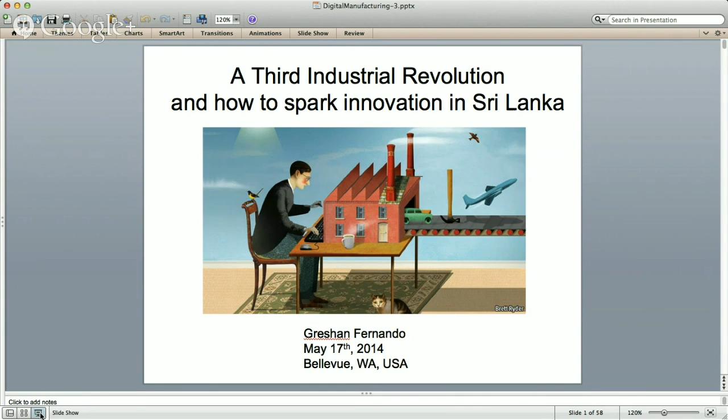Now, before that, let me talk about some historical perspectives in terms of industrial revolutions. As you know, we had the first industrial revolution that started in Britain in the 1700s, and it started with the mechanization of the textile industry. The large textile mills were born, or in other words, the factory was born in that era during the 18th century.

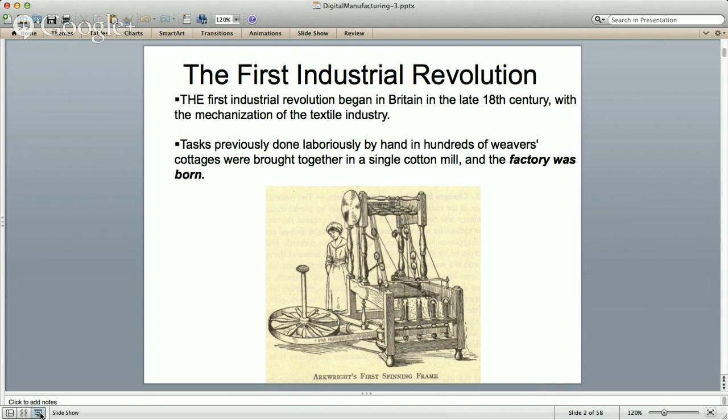Then there was a second industrial revolution in the early 20th century, where Henry Ford mastered the moving assembly line and ushered in the era of mass production that we know today. With that, we had the expansion of railroads, development of steel and oil industries, a communication revolution, and great advances in transportation.

Those are the good things, but there were also bad things that came along, like very difficult conditions for the industrial workers, and massive profits for business tycoons that created income disparity within society. So there were a lot of good things and bad things that came along with these first and second industrial revolutions.

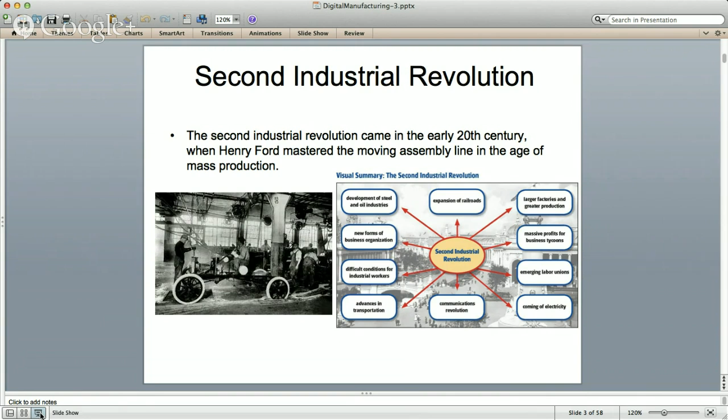This slide shows a comparison of the first and second industrial revolutions. In terms of energy, in the first industrial revolution the main energy source was coal, and in the second industrial revolution it was petroleum and hydroelectric power.

Now, as we know today, coal and petroleum are the biggest culprits for global warming. So these industrial revolutions have introduced massive new problems that threaten our world today. Although we had a lot of positive impacts to society from these revolutions, we have also experienced great challenges that came along with that.

As I said earlier, the first two industrial revolutions made a group of people richer, and a group of people became more urban, as we know today. So we have a very rich group of people today, like business tycoons, and then we have a very poor majority of people today who work for these business tycoons or big companies.

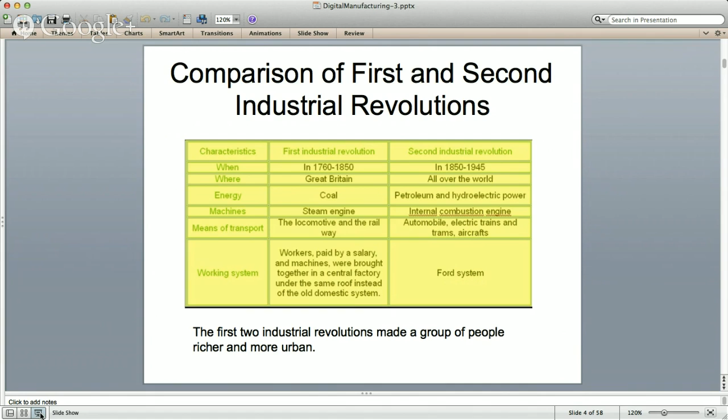Do you guys have anything to add on what I just said? These are some historical perspectives that I wanted to start with. I would like to hear any thoughts on what I just said, if there is any. But you don't have to, I'm just asking. All right, I think they already studied this, so you can go ahead.

Sure, thanks. Okay, and then after these two industrial revolutions, there came a digital revolution that we all know very well today. In fact, most of the participants here in this discussion know very well about this digital revolution, so I don't have to talk especially on this one. In fact, we have this Google Hangout session thanks to this digital revolution.

This digital revolution marked the beginning of the information age, and that created some new opportunities. In fact, the next industrial revolution was facilitated by this digital revolution. As an advancement of that digital revolution, this third industrial revolution is underway - that is, manufacturing is going digital.

With the digital revolution, we had enormous progress, of course, and the focus of discussion is not to talk about those things like internet and cell phones and everything that we enjoy. As you know, all these revolutions were disruptive. They changed society.

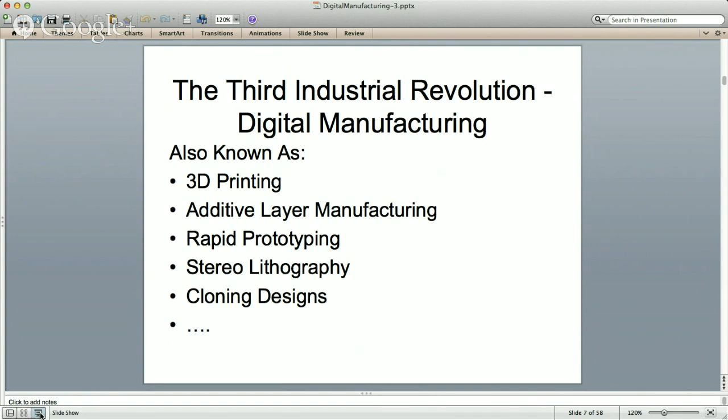There may be several other terms loosely used that mean the same thing. So I'm going to go through a brief technology overview.

Digital manufacturing consists of a class of technologies that can directly construct physical objects from computer-aided design files. As I mentioned earlier, this digital manufacturing could trigger innovation worldwide and provide opportunities for everybody towards prosperity. It could greatly improve product accuracy and eliminate the mistakes we do today in product development.

Most importantly, we can customize products with greater flexibility, and also have something called personal fabrication, meaning we can make things for our own consumption as we wish. It will accelerate time to produce, reduce product cost, and improve collaboration globally—meaning we can share our designs globally and make things locally. It could save this planet and save your life one day.

So again, I will show you some examples toward that direction. Now I'm going to show you a YouTube video on the things I just discussed. Let's watch it—it's about 7 minutes—and after that let's get back to the presentation. Chaminda, how are we doing with the time?

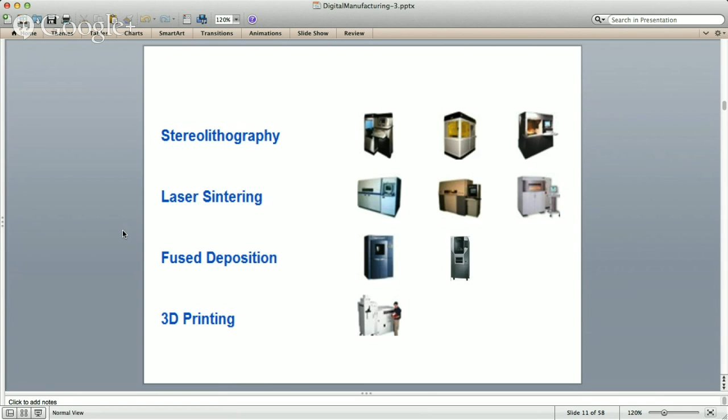Now these machines range from like 10,000 to sometimes $500,000 today. Some of these fused deposition machines are very expensive, and laser sintering machines are also very expensive today. But there are 3D printers that we can buy from Amazon.com today for like $500 or sometimes $1,000, and they can produce parts using plastics only, with a small build volume. Now the machines you see here are commercial grade ones, and we have some of these at Boeing. Unfortunately, I don't use these machines directly, I'm not directly working on 3D manufacturing at Boeing, but I have seen this in operation there.

Now, this is a functional assembly, as you see here, that was printed as a single step, single shot from a 3D printer called the Z printer from Zcorp. Zcorp is now called 3D Systems today in the US. Now these are printed using powder material, so this is just a prototype, but it's a functional thing. These parts move and it functions as expected, but it cannot carry any loads in this particular one, so it's not very strong, but this was done about 4 years back by Zcorp. So, as I said earlier for one of the questions you had, they have built functional assemblies.

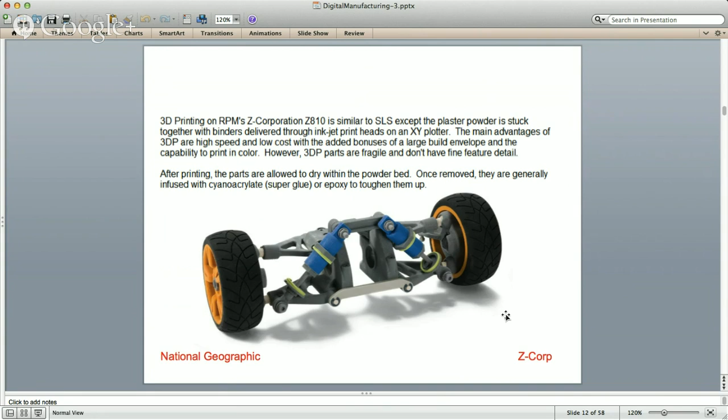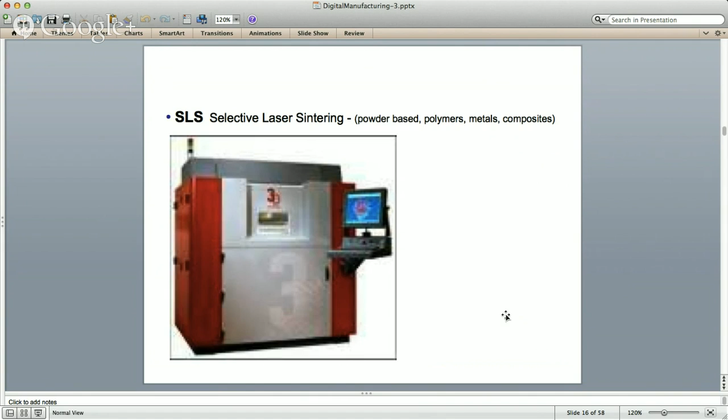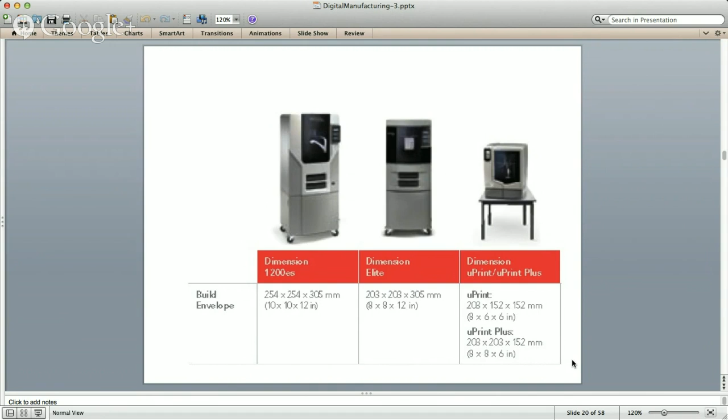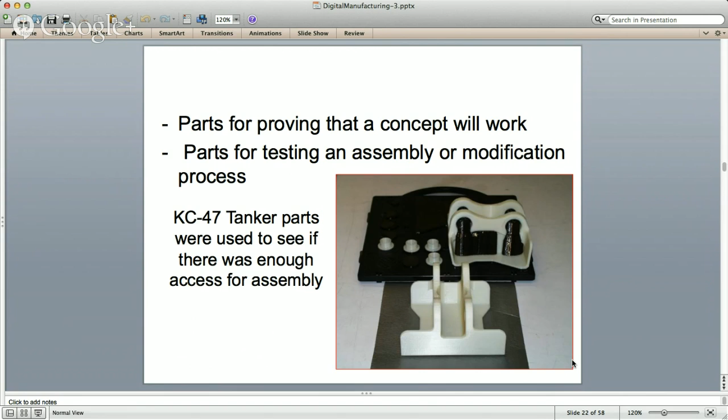Now let's look at some of the applications today. This is an application at Boeing. We produce 3D printed parts to check things, especially for rapid prototyping, to make sure the concept will work, and for testing an assembly or modification process. Even today, the KC-47 tanker, a Boeing aircraft being built for the United States Air Force for refueling aircraft in the sky, is a big airplane that carries a large amount of fuel to refuel other airplanes in combat operations. They use a lot of rapid prototyping with 3D printed parts in developing that aircraft today.

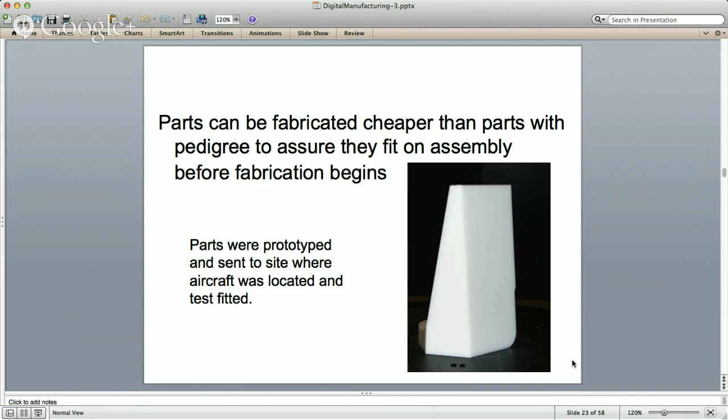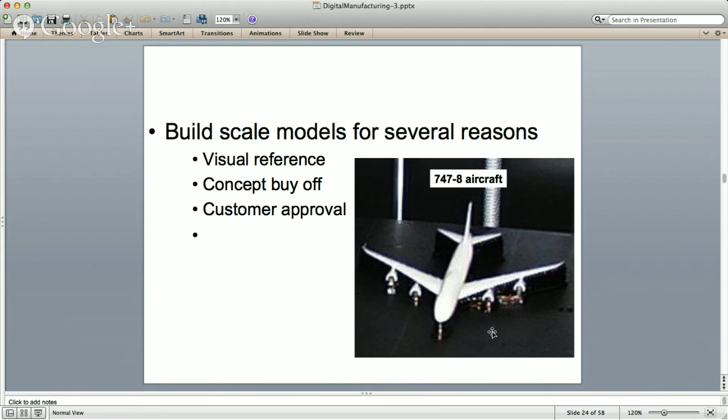In architecture, after designing the building we can have a replica that can be 3D printed, so you can visualize it. It's been used widely in architecture today in the US, where we can touch, feel, and see it before the building is actually built.

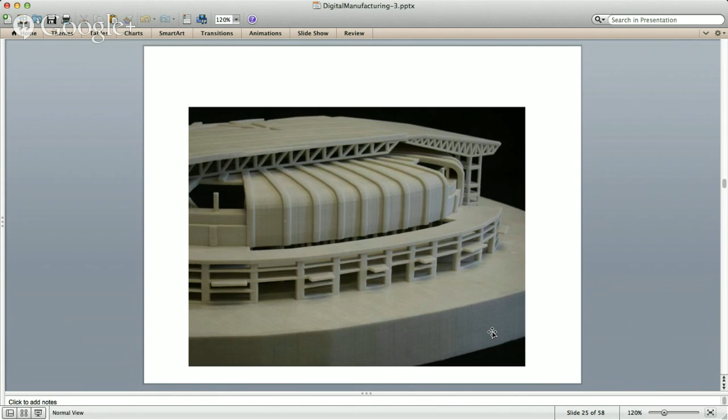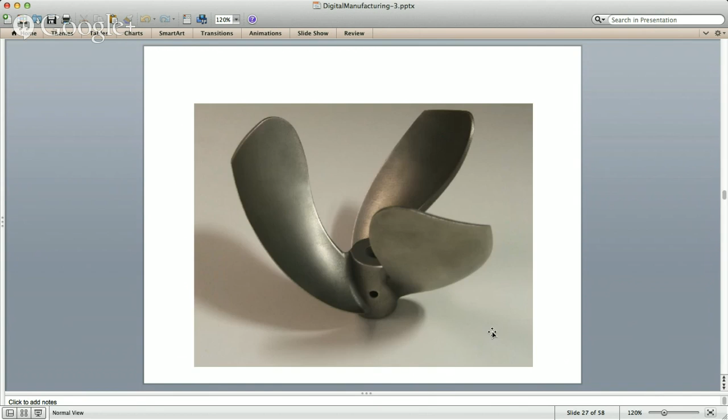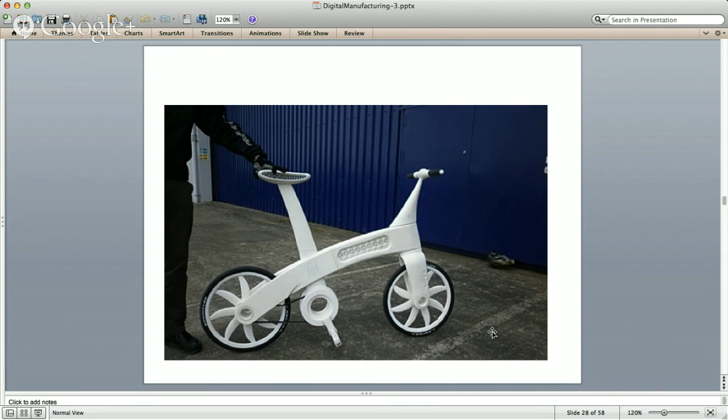Not only small stuff - now they have printed houses using the same technology, building big houses. When you build houses this way, it's called contour crafting, and the University of Southern California has a big research effort going on in this area.

There's a video linked here that I'm not going to show now, but we can see it later when I send you the presentation, and I'll share it in the Google Hangout as well. It shows a building built using a 3D printer, a big house actually, and the important thing is the entire house was built within 24 hours - remarkable, of course.

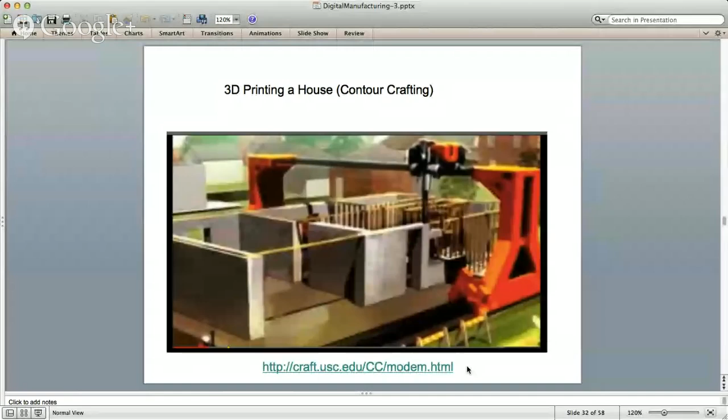And they are planning to drive this car from East Coast to West Coast in the United States, which is going to be about 5,000 miles. And they are going to do it using just 9 gallons of petrol - 5,000 miles using 9 gallons. So they have designed the car in such a way that it gets greater fuel economy. And in fact, the engine is going to be a hybrid engine, of course.

But it's very lightweight, and these shapes can be achieved with the greater flexibility of 3D printing. And as I said, it's a functional system, a functional structure that works.

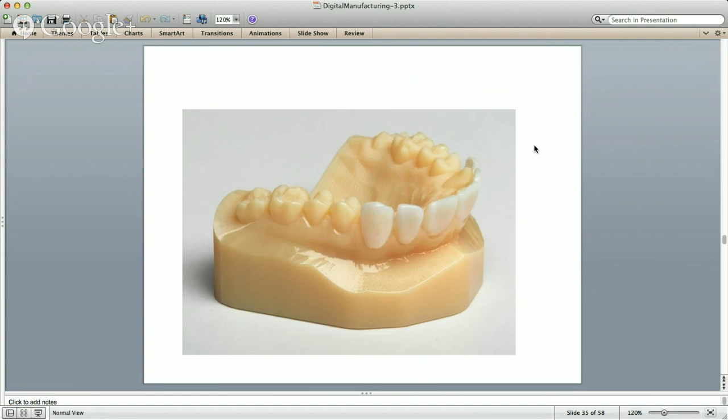And then again, there are a lot of applications in dental science and also in medicine, of course. So the tooth can be manufactured using 3D printing very easily. And things like the skull with a see-through material can be produced in a single shot using this. And again, this is a similar one.

There's a - sorry, I hear some noises. Is there a problem? Hello? Chaminda, is there a problem? Go ahead. No, okay.

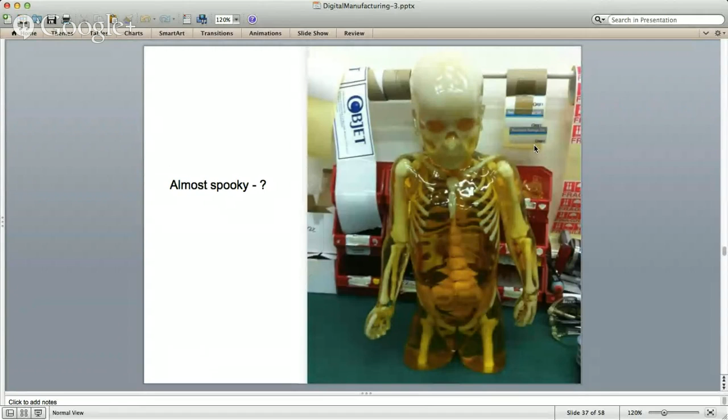And then this is a lower jaw that was used in a transplant that was 3D printed. So this is a medicine application where the 3D printed jaw was made out of titanium powder in a 3D printer.

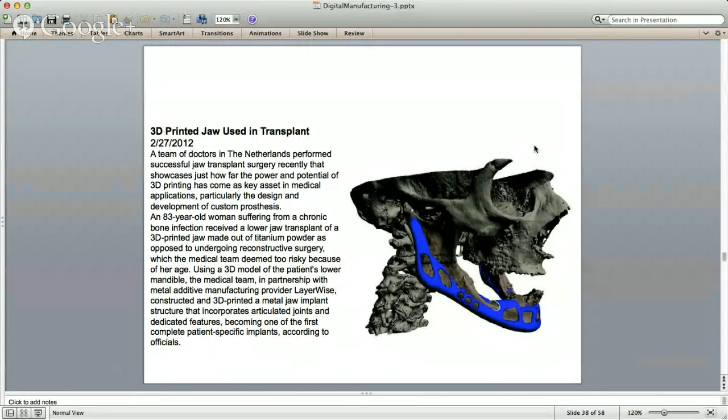And then they have these 3D printed hearts, and then when you have burnt skin from a fire or something, the skin can be 3D printed directly to your body. So the machine that you see on top can be used to directly print your skin using stem cells. You can print the skin directly onto your body, and that way you can repair the skin within a very short time.

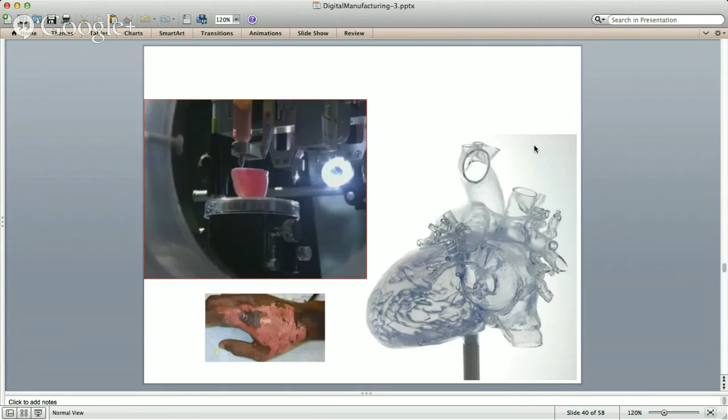And this is another biomedical application of 3D printing, where they print human organs like kidneys and livers. The technology is the same, but the material is tissue cells, in other words stem cells. So the stem cells are deposited in an organized manner, layer by layer, to produce functional organs today. And there are several companies doing this in the US today.

It has greater potential. They have printed human tissues, and they have not directly used those organs in patients yet, but that can happen in the near future, in another 4 or 5 years from now.

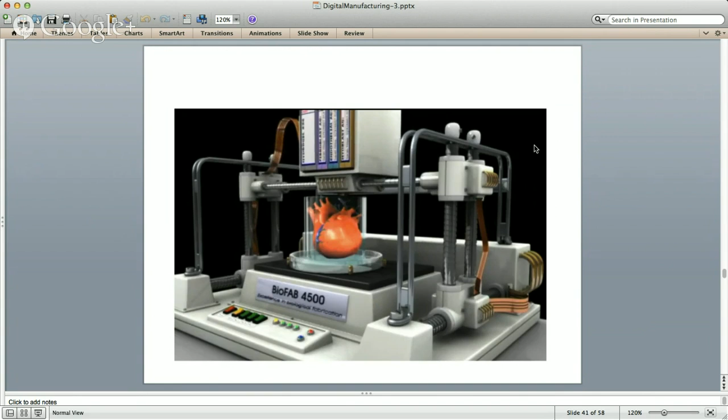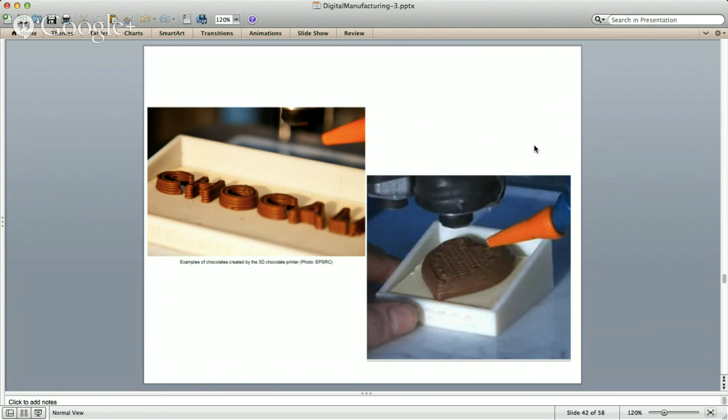And then again, it can be used in a lot of fancy stuff, like producing different shapes of chocolate and a lot of other food items, of course. So that's another area - the applications are enormous.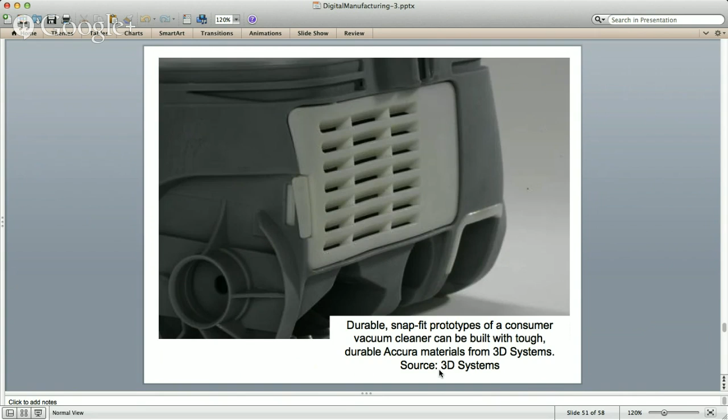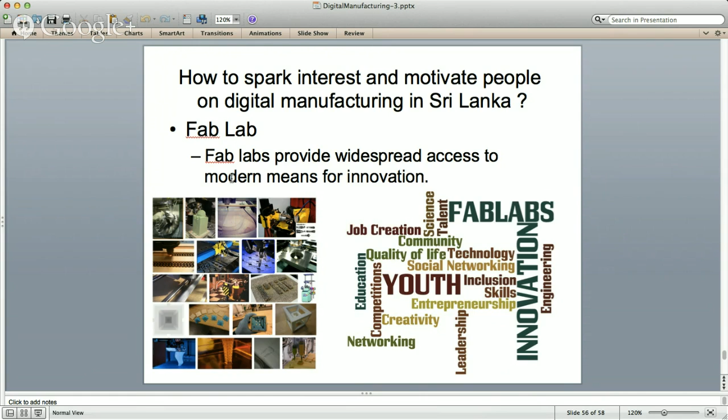Sorry, I was interrupted. So that's my idea. Now I know that we have to have some sustainable models if you're doing a Fab Lab like that. There are various models - we can create one with money we provide, but we need personnel to operate and manage it.

We could charge for hourly access, but I don't personally like to do that. We can use it for personal production and generate money, and we can use it for education - providing workshops, training, and even some degree certification for companies.

We can sell education using the Fab Lab, and it can work as an enabler for products and services to other companies. It can be used as a mechanism for invention, like new business creation, individual entrepreneurs, joint ventures, and so on.

It can network with a lot of other organizations and institutions within Sri Lanka and worldwide. So those are some sustainable models we can think of. These still need thinking through and planning - there's a lot to do before we start one. But my main objective today was to spark interest in that direction. So with that, that's the end.